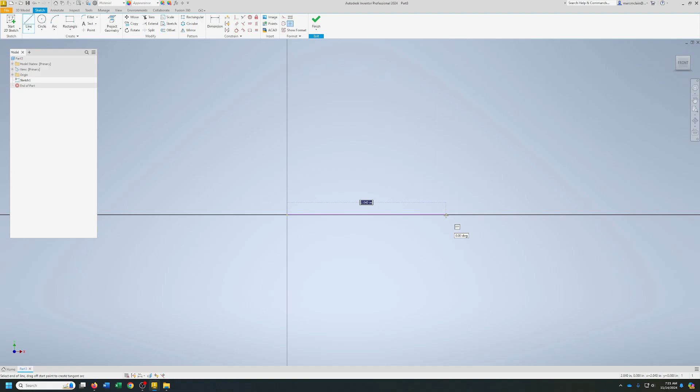This time I'll start from that point. I'm going to zoom out a little bit, and just kind of draw the thing.

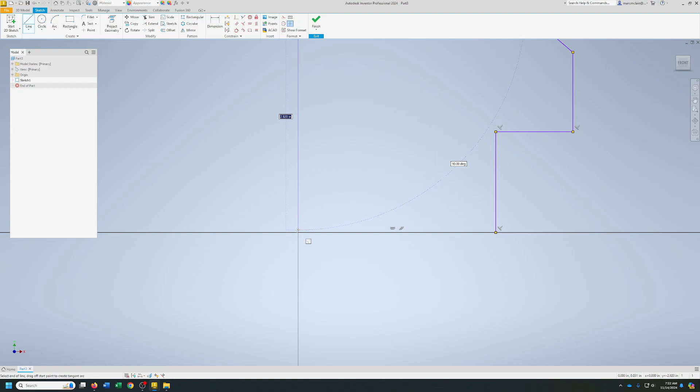As you draw, you'll notice little things like the little perpendicular indicator at the bottom, and you'll see the constraints on the lines you've already drawn. That lets you know everything is hunky-dory and straight. So we got two circles in there, one here and one here. Now obviously those are not the right size.

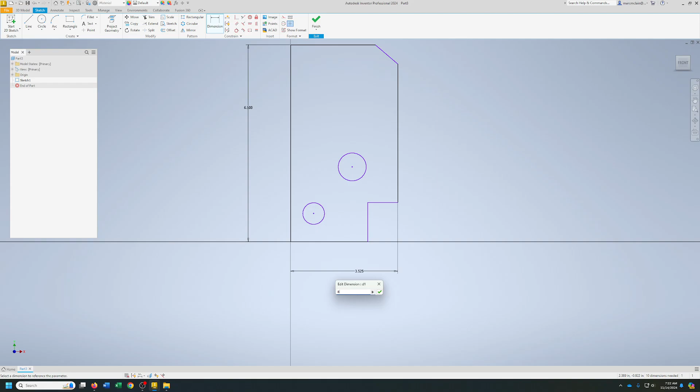So let's dimension it. We know our top view here is going to be 6.5, and all the way across is going to be 8. That's really funky looking, isn't it? So let's start doing stuff.

So here to here is 6.5. This line we don't know, so I'm going to escape that. This line we do know, it gives us this in the book. That one's going to be 2.5, and this one is also 2.5. Now see that dot? You don't want to grab the dot, you want to make sure you grab the line.

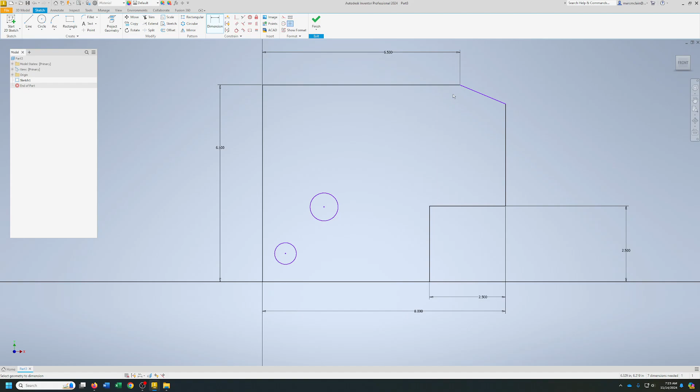All right, now it's starting to come together a little bit. From there to there is 5.5. Okay, so now we've got everything in place.

All right, let's get this one here. Now that's going to be 5. And from the top it will be 1.5, and the size of that one is 1.5.

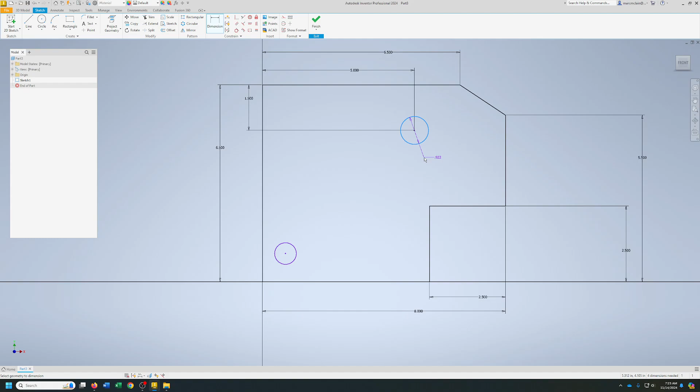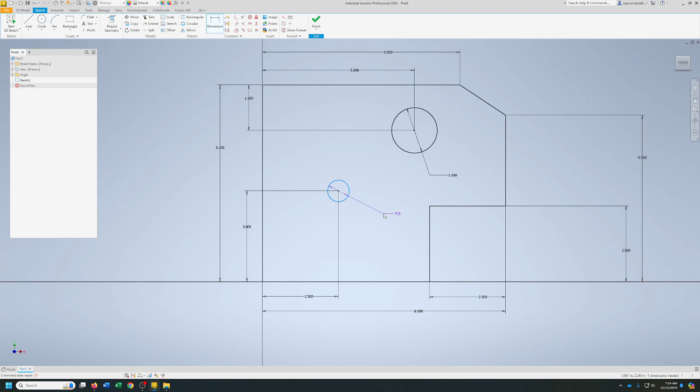That dimension there is going to be 3, and this dimension here will be 2.5. Notice how it defaults to diameter. If you want radius instead, just right click, go to dimension type, and there's radius. But we're going to stay on diameter because this is a diameter, 2.5. Whoops, there we go, 2.5. And once again, see, everything's constrained.

So we will finish our sketch. Hit the home button, it'll zoom out so you can see, and extrude. We'll look in our book to see how much our extrusion is supposed to be. You can put that in either here or here, and it's going to be 0.125. That's really thin, that's 1/8 of an inch.

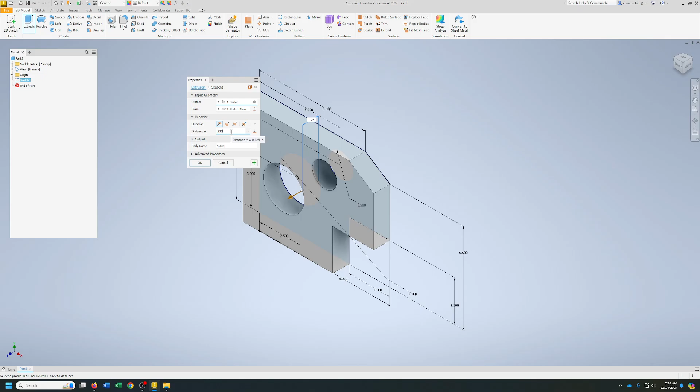So that's a spacer plate, just use this kind of a shim to do something with. And there you go, your spacer plate's done. Everything's great. We'll go ahead and save that and call it CAD 2.

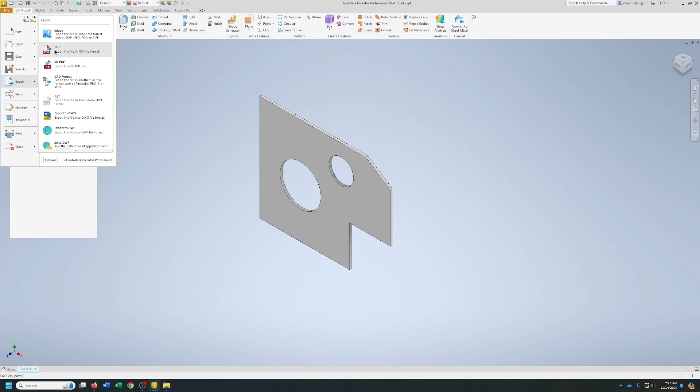And save it. All right, then go to File, Export, PDF, and we'll call that CAD 2 PDF, and we'll save that as well. And that's it for CAD 2. I'll see you for CAD 3 later.